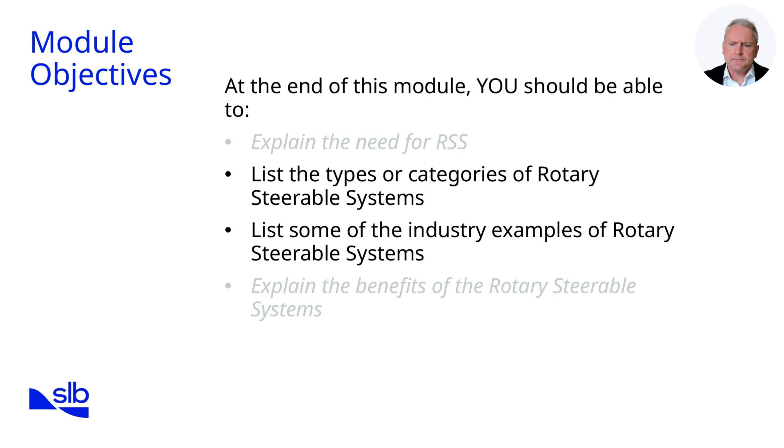What we see here are the 4 types of rotary steerable systems as defined by the IADC, with diagrams shown in the lower half. Starting at the top, case 1 is the push-the-bit system. Here, pads extend from the tool body to push laterally against the borehole wall, forcing the bit to deflect. The diagram of case 1 shown at the top of the blue panel illustrates this lateral displacement. Examples include the SLB PowerDrive X6, Halliburton's iCruise, Baker Hughes AutoTrack, NOV's VectorEDGE and VectorZIEL, and Weatherford's Magnus.

Case 2 is the point-the-bit system shown in the second diagram. This design tilts the bit shaft relative to the tool axis to change direction. It provides smoother curves and is less dependent on borehole contact. Examples include Halliburton's GeoPilot, Weatherford's Revolution, Terravici, and Gyrodata's WellGuide.

Case 3, illustrated third, is the permanently deflected bit design. The bit shaft is built at a fixed angle to the tool body, producing predictable curvature but less flexibility. The SLB PowerDrive Xceed and Xcel are examples.

Case 4, at the bottom, is the hybrid system, combining push and point capabilities through articulation. The SLB Archer is the main example.

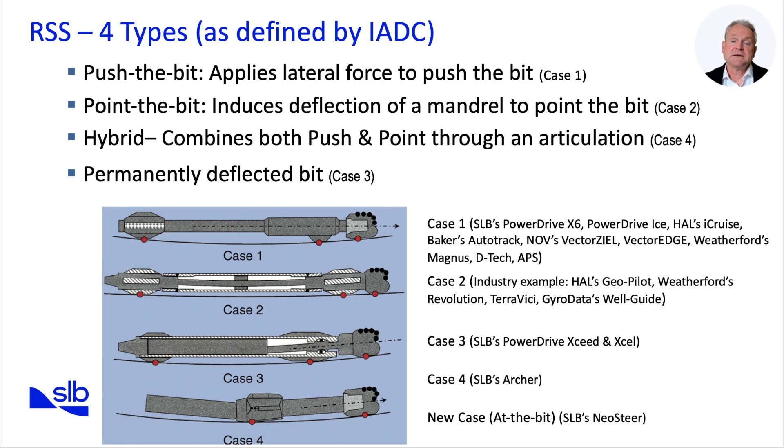Finally, a new category, at-the-bit steering, is shown separately, represented by SLB NeoSteer, which places actuation pads directly at the bit face for immediate directional response. The takeaway is that RSS is not a single technology, but a family of designs, each suited to different drilling challenges.

Information was pulled from the Offshore Magazine 2015 Rotary Steerable Drilling Systems Directory. This table shows the competitive landscape. All major companies field RSS, but designs differ: push, point, hybrid, or at the bit. Claimed dogleg severities vary from 3 degrees to 18 degrees, and hole size ranges from 5.75 inches to 28 inches. The message is clear: RSS is a crowded market, and engineers must match tool choice to well objectives.

What this does not show is that the more established service companies in this space have evolved through technological improvements and reliability, which the new entrants still need to build. The message is buyer beware. All these competing offerings will likely pass the technical requirements in a tender, but may be limited in terms of support and reliability.

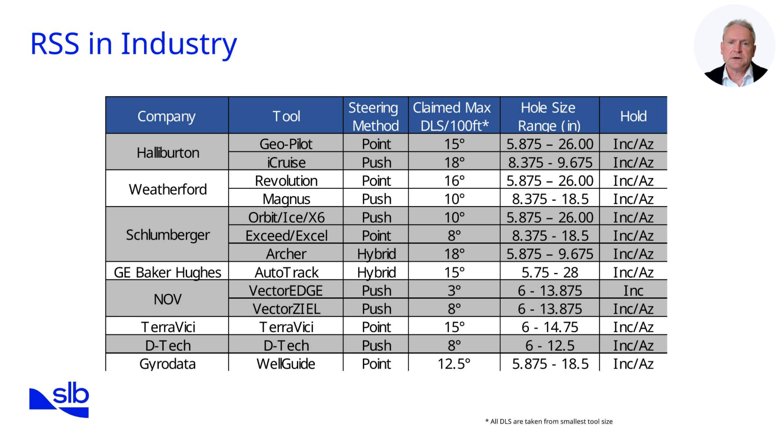Examining the new technology offerings, which are based on the IADC Case 1 push-the-bit category. Top left, Halliburton's iCruise in the red housing displayed at a trade show. This is based on the SLB PowerDrive X6 push-the-bit technology.

Top right, the SLB NeoSteer at-the-bit system. The bit has push-the-bit pads in the bit. Applying the push force at the bit significantly increased the doglegs that are possible. The initial focus was on the shale plays in the US land. Bottom left, Weatherford's Magnus. This again is based on the SLB PowerDrive X6 push-the-bit technology.

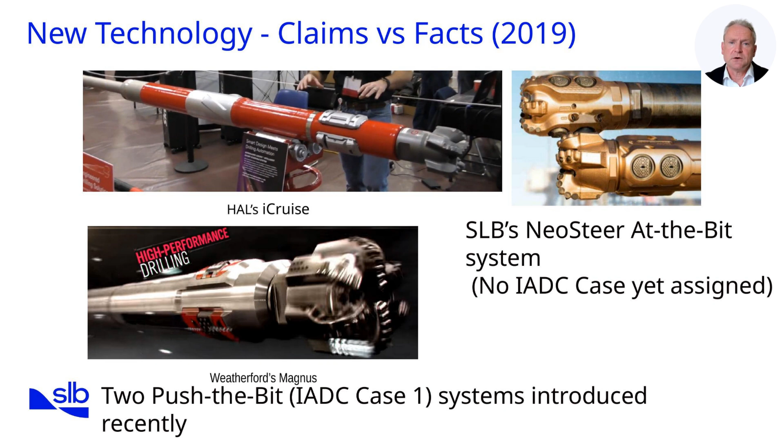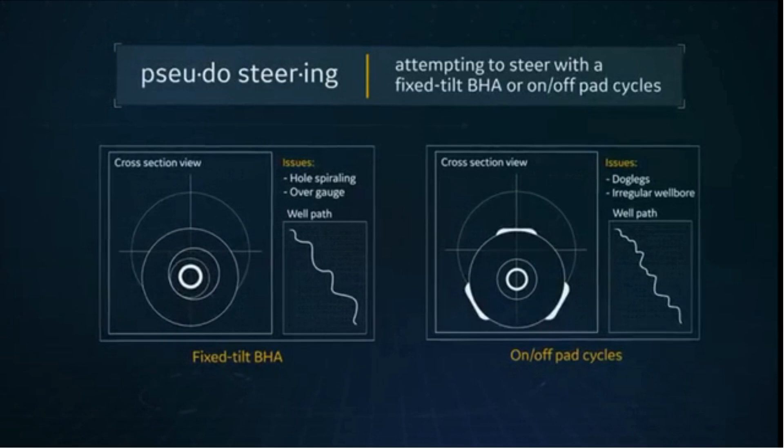On this slide, we see Halliburton's GeoPilot 9600 series systems displayed vertically from top to bottom, each tool with a short description. At the top, the GeoPilot XL 9600 is shown. This is a point-the-bit rotary steerable tool offering high reliability and speed. Its design tilts the bit shaft to change trajectory, giving smooth curves and accurate control.

The second tool is the Solar GeoPilot XL 9600. It looks similar, but it is rated for extreme HPHT conditions, up to 175 degrees Celsius and 30,000 pounds per square inch. This makes it suitable for the most hostile environments where standard tools cannot operate.

Next is the GeoPilot XL with stabilized lower housing, shown with a red stabilizer section. This modification provides better control in soft formations with low to moderate build rate requirements, preventing tool instability.

Below that is the GeoPilot Dirigo, formerly EDL. This version is designed for enhanced dogleg capability, allowing aggressive build rates. It is ideal for challenging curves or sidetracks.

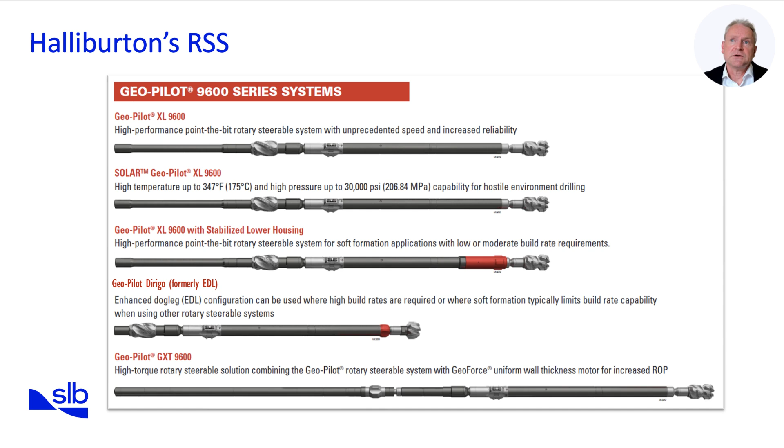Overall, this demonstrates Halliburton's comprehensive RSS portfolio, from robust standard tools to HPHT-rated high build and high torque systems, encompassing nearly every drilling environment.

Looking at the detailed schematic on the right of Halliburton's GeoPilot rotary steerable system, the central image shows a cutaway view of the tool body, with labelled internal components extending approximately 18 feet. Starting from the left, you can see the rotary seal, anti-rotation device, and bearings.

Moving along, there is the pressure compensator, control electronics, and sensors. Toward the bit end, the eccentric cam unit and near bit stabilizer are highlighted, showing how steering forces are applied.

The system measures at-bit inclination with azimuthal gamma ray located just 3 feet behind the bit, giving precise well placement data. The outer housing rotates slowly or remains stationary, while the internal drive shaft continues to spin, delivering torque to the bit. Anti-rotation wheels help lock the housing against the borehole wall, limiting unwanted rotation.

Finally, the note mentions that the maximum dogleg severity was reduced in the redesign, balancing durability with steering capability.

The GeoPilot works as a point-the-bit system. By tilting the shaft using the eccentric cam unit, it changes the bit's orientation relative to the borehole axis. This delivers smooth, continuous steering while maintaining full rotation. The schematic shows how mechanical design and sensor placement combine to produce precise controlled directional drilling.

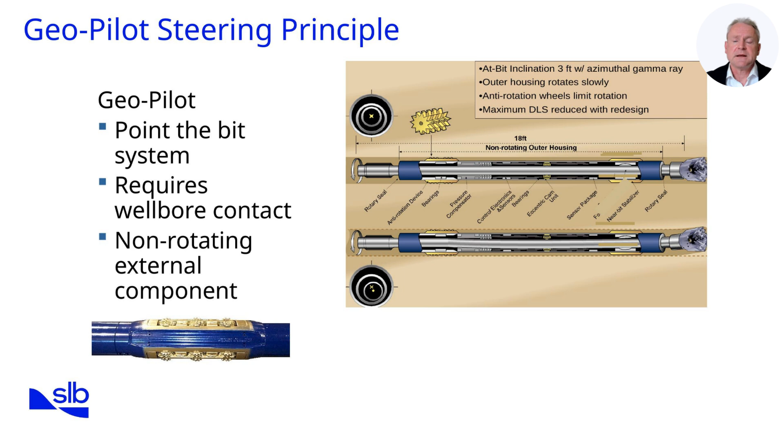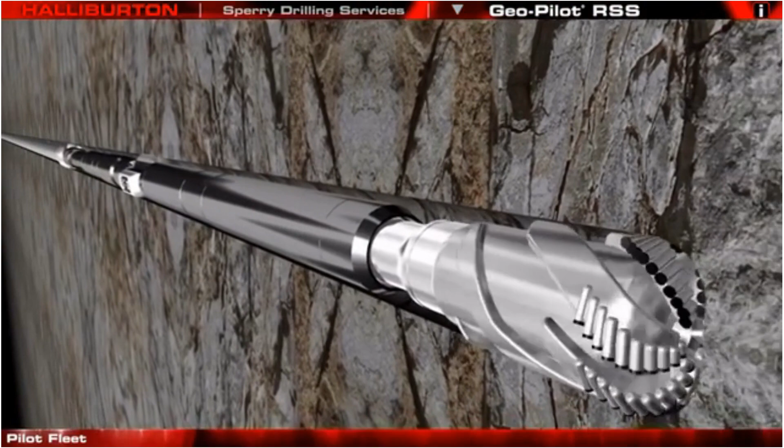GeoPilot Rotary Steerable System. As part of the pilot fleet of automated drilling systems, the GeoPilot is the industry's most proven point-to-the-bit rotary steerable system. Azimuthal gamma and inclination sensors just 1 metre from the bit provide tight control on wellbore placement and geosteering.

The bit is pointed by flexing the internal drive shaft. The advanced geospan downlinking system provides total control while on-bottom drilling without interrupting the drilling process.

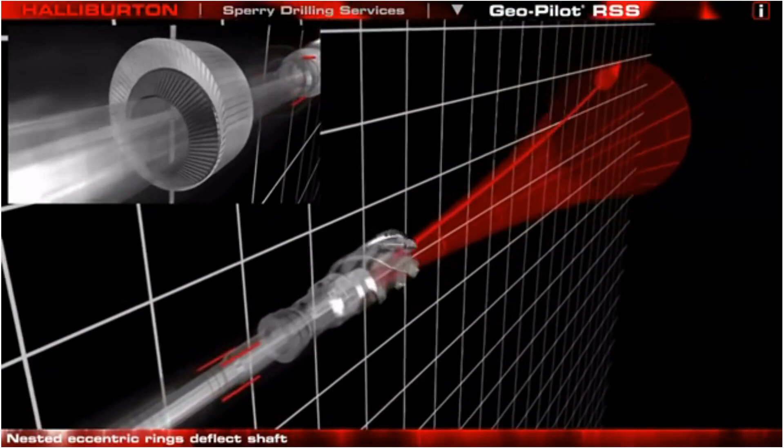The shaft is flexed using a pair of eccentric rings controlled by a gear and clutch system. This design is capable of over 12,000 possible settings, generating up to 6 degrees per 30 metre doglegs, and makes the GeoPilot virtually immune to formation tendencies.

The system is designed to exploit the proven benefits of extended gauge bits: low wellbore friction, improved hole cleaning, low vibration, and longer bit life.

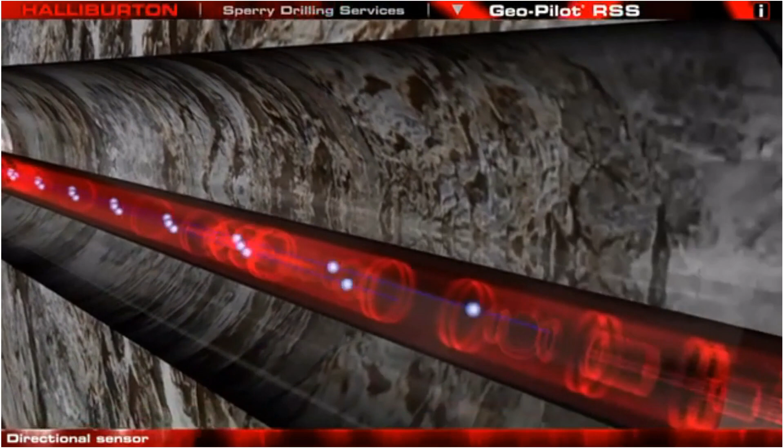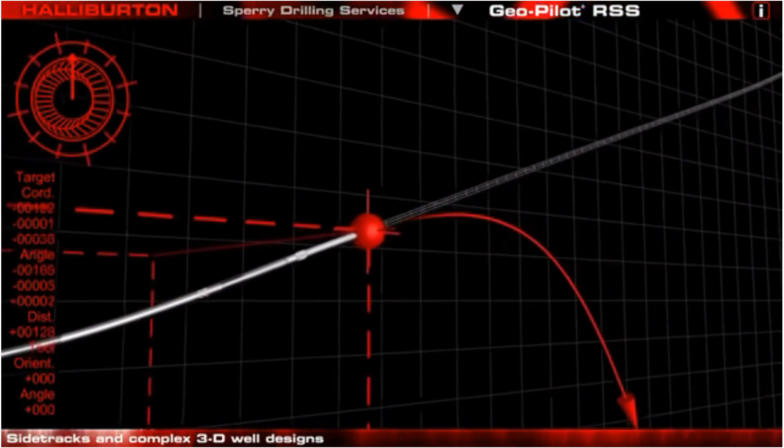This makes the GeoPilot ideal for drilling extended reach wells and ultra-long horizontal sections through the reservoir for maximising production. The GeoPilot is also excellent for open hole sidetracks from existing wells. It is well suited to drilling everything from simple wells to the most complex 3D well designs, such as connecting multiple marginal targets for higher recovery.

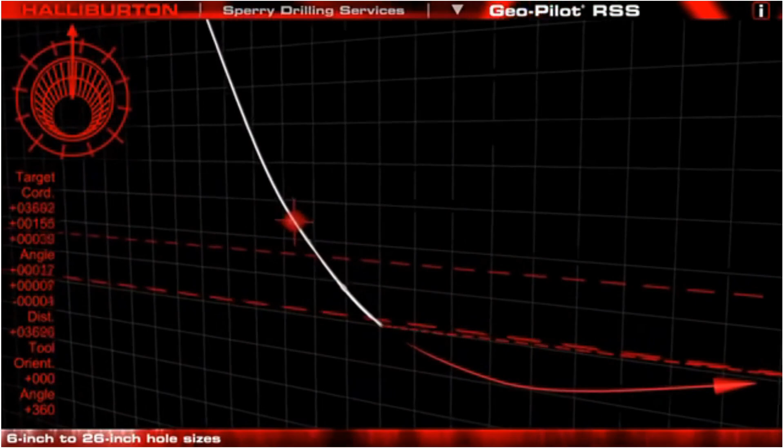Weatherford is positioning Revolution as a smoother, more precise alternative to push-the-bit systems. The non-rotating sleeve reduces spiraling, which improves hole quality and makes casing runs easier. Revolution is particularly effective in complex well paths requiring smooth curves and accurate directional control.

The non-rotating sleeve design is a compromise that limits operating parameters and increases the risk of getting stuck. The next slide shows a video on its operation.

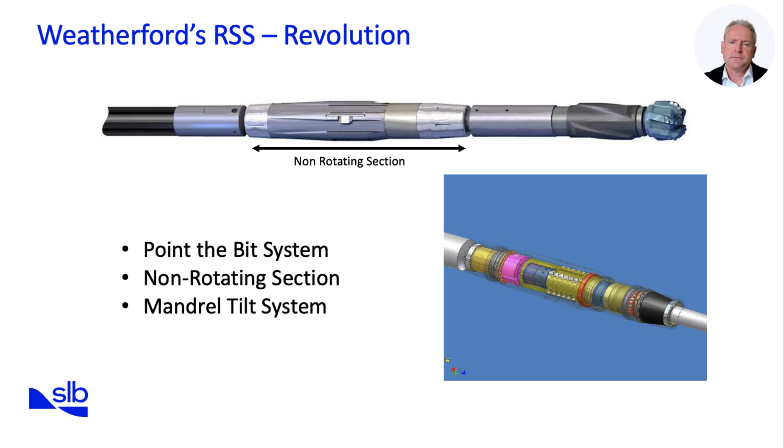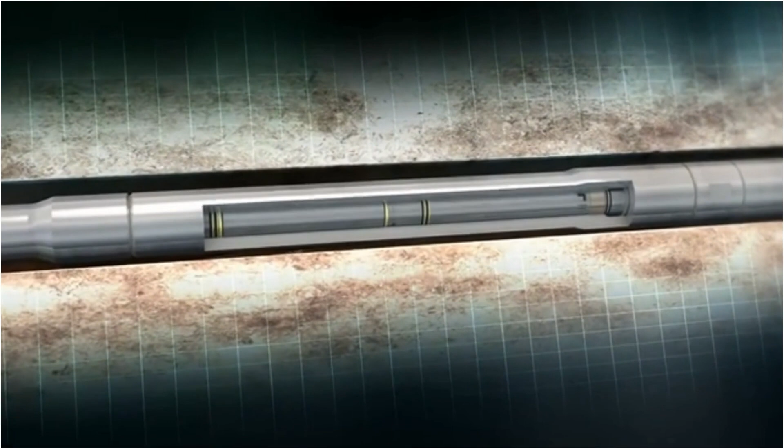It fits hole diameters from 5 7/8 to 22 inches. The RSS assembly consists of an integral stabilizer fitted on the MWD collar, a short non-rotating bias unit, and a lower pivot stabilizer. The upper collar of the RSS bias unit houses control electronics, the brains of the tool, and the lithium battery power pack.

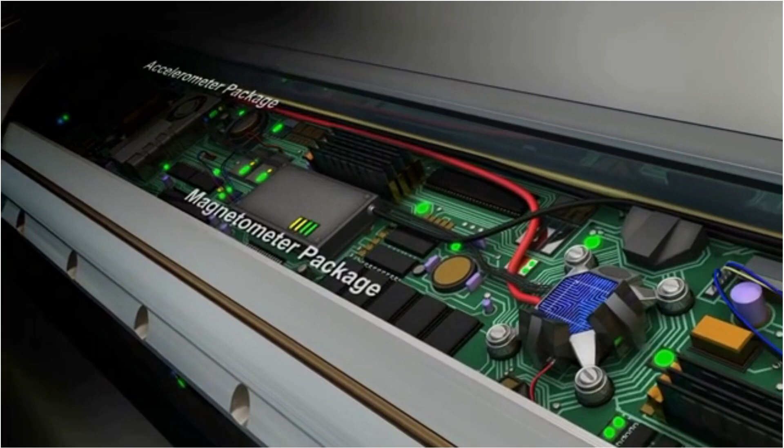The control electronics insert contains navigational sensors, including the accelerometer and magnetometer package, a CPU, memory boards, and the world's first high-temperature angular rate gyro to detect and mitigate damaging shock and vibration when drilling in extreme environments.

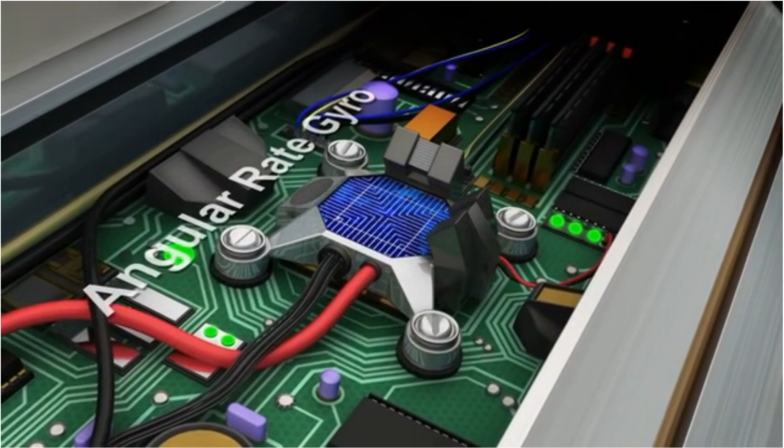The non-rotating unit mounted on the main rotating shaft enables the shaft to be deflected in any required direction to accurately control the well path.

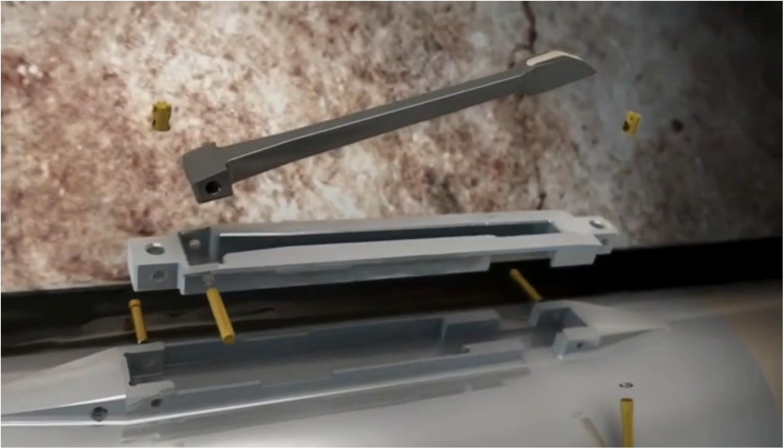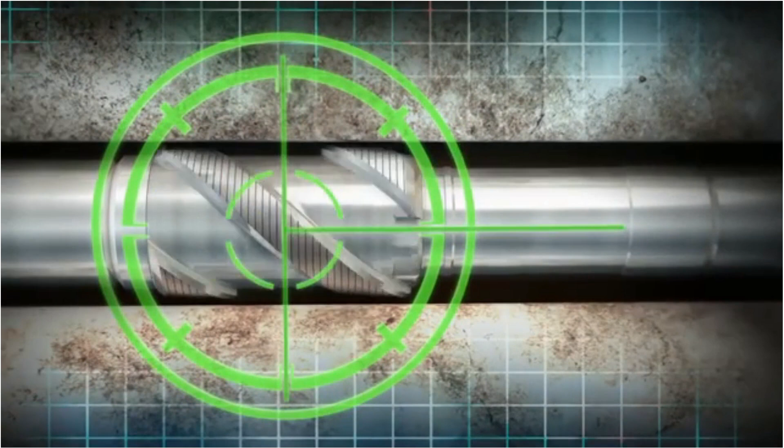Anti-rotating levers, or ARLs, mounted radially on the sleeve stabilizer blades hold the bias unit non-rotating sleeve steady. The lower pivot stabilizer acts as a fulcrum point, transferring shaft deflection and pointing the bit face in the required direction.

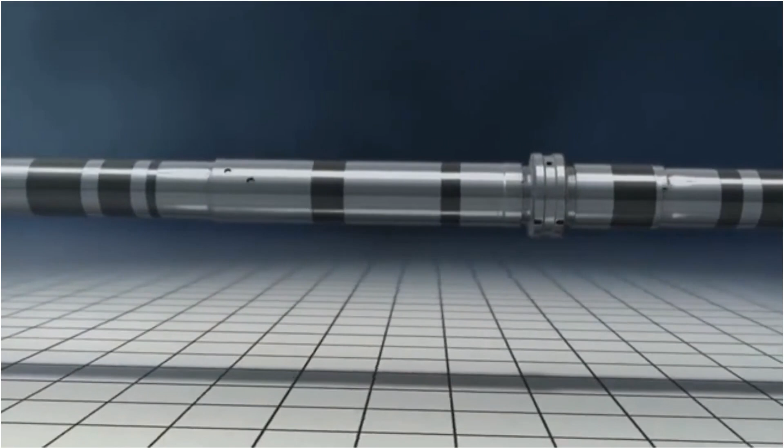The RSS bias unit drive shaft runs through the center of the non-rotating sleeve, delivering torque to the bit. The shaft can be deflected in any direction at the appropriate angle to build the desired dogleg.

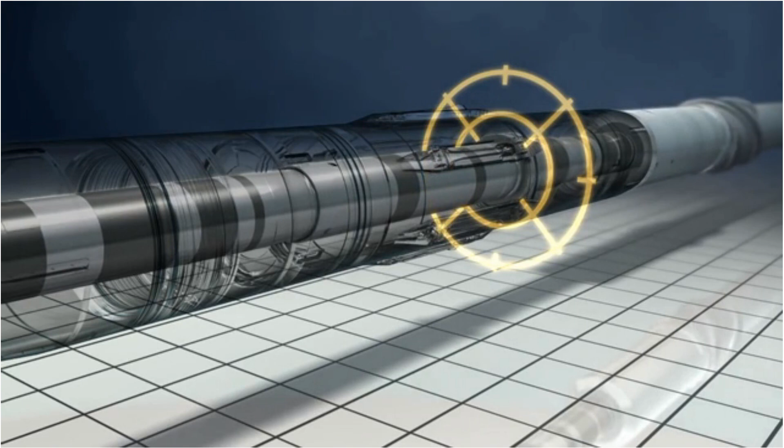The drive shaft deflection is transferred through the pivot stabilizer and therefore points the drill bit face in the required direction with the correct amount of tilt to achieve the planned well path.

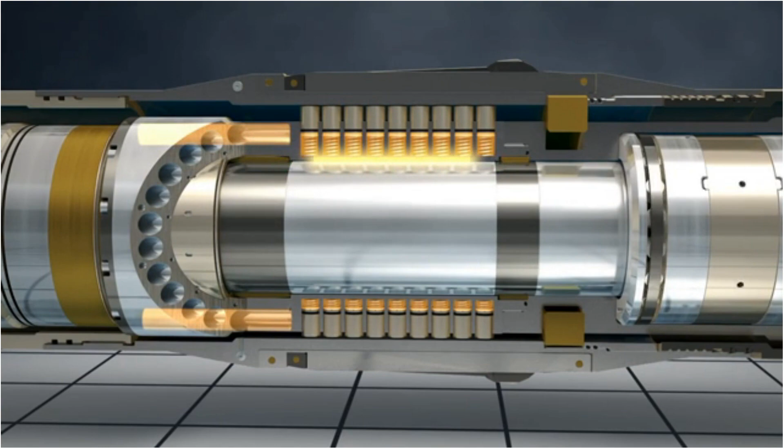The drive shaft is deflected off-center by the piston manifold housed inside the non-rotating sleeve. Deflection is parallel to and along the length of the sleeve piston manifold housing. Therefore, no point load is transferred to the shaft.

The Revolution system piston manifold consists of 12 banks of pistons mounted 30 degrees apart. As the center shaft rotates, it operates an internal hydraulic pump.

A commutating valve is located on the rotating shaft. As the shaft rotates, the valve passes each bank of pistons once per revolution.

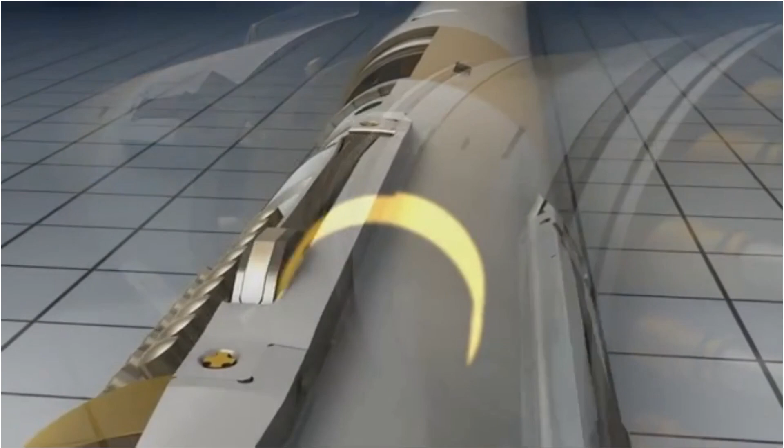The position of the commutating valve is referenced to the navigational sensors mounted in the control electronics. Therefore, the position of the valve with respect to high side tool face or magnetic azimuth is known at any given time.

A solenoid valve is operated when the commutating valve is adjacent to the bank of pistons that are to be energized. When the solenoid valve operates, the high-pressure hydraulic fluid is directed to the bank of pistons, pushing them outward and deflecting the piston manifold and rotating shaft in the opposite direction.

The Revolution suite includes 4 versatile systems to meet a range of drilling challenges. With a point-the-bit design, real-time measurement of key parameters, and advanced communication, the Revolution RSS helps you drill wells precisely, efficiently, and smoothly.

Ice for HPHT, Archer for high doglegs, Xceed for harsh environments, Vortex for torque and reaming, and NeoSteer for rapid, precise steering. SLB has positioned itself as the only provider covering the full range of RSS technologies, enabling operators to choose the best fit tool for any environment.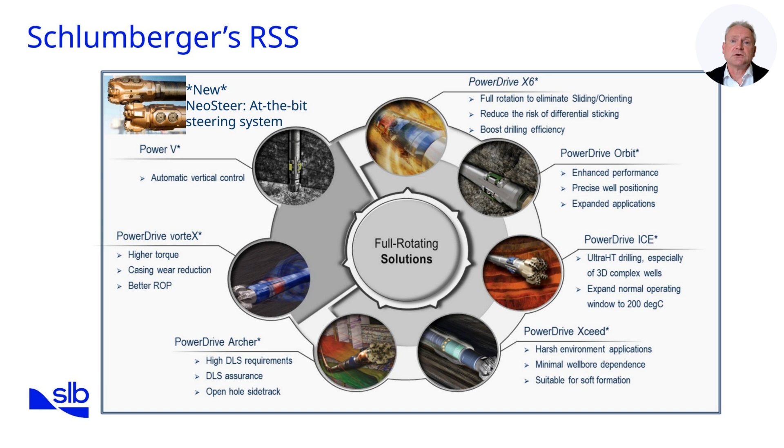To recap, in this submodule we reviewed the different categories of rotary steerable systems from Case 1 to 4 and the additional at-bit steering system from SLB. We then looked at the industry examples available in the market today, including Baker Hughes AutoTrack, Halliburton's GeoPilot, Weatherford's Revolution, and the full suite of offerings from SLB.